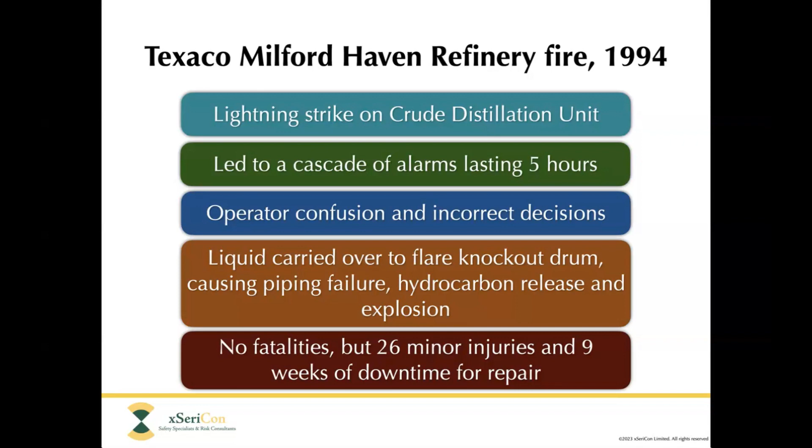And I could give several other examples as well, but I think one is enough just to get a feel for why this is an important issue. So what are we actually trying to do then with alarm management? What we're trying to do is to look at the alarms that are configured in the system and to make a decision about whether each alarm really needs to be there and whether it's actually serving a useful purpose.

In the alarm management process, we are trying to make sure that every alarm has a defined purpose. We're trying to make sure that each alarm can guide the operator to take an appropriate corrective action. So in other words, it actually helps him to understand what's really going on, what is the root cause of the situation that he's facing.

And we're also trying to make sure that those alarm floods, like the situation that happened at Milford Haven, are as unlikely as possible to occur. We can never say never, but there's a lot that we can do to reduce the risk of alarm floods. Because once the alarm system is in flood, the operator really has very little chance of coping with the situation, because he's just dealing with a red screen and with a siren going off all the time. It's very hard for him to mentally stand back from all of that kind of intrusion into his mental space and really try and focus in on what's happening.

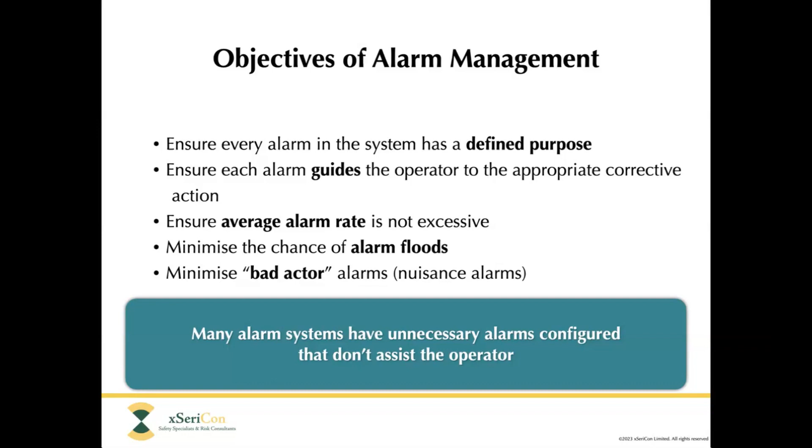And the other thing we need to do is minimize what we call bad actor alarms. And these are alarms that are coming to the operator but are not helping him, maybe because there's nothing he can do, or maybe because the alarm is not really necessary, or maybe because the alarm is always on, is always there, and he knows that it's just a nuisance and there's nothing he is supposed to do.

So overall, what we're trying to do is to make sure that the alarm system can actually provide its function of risk reduction, or to put it another way, that it actually functions as a layer of protection. As you may know, if you've got experience of doing HAZOP studies or SIL assessments, very often we take credit for alarms with operator response as a way of reducing the likelihood of an initiating cause, an initiating event, propagating through to a serious incident. And we can only be confident that the alarms can really provide that kind of risk reduction if we're sure that the system is well set up.

In other words, that the operator has actually got the ability to respond to the alarms, enough time, and the alarms actually help him to understand what's going on, that he's not going to be overwhelmed with too many alarms or useless alarms, and that he actually has confidence that the alarm system is basically doing what it's supposed to do, and not just providing new and irritating noise in the background and covering the screen with messages that he doesn't know what they mean, or he doesn't know how to respond to them.

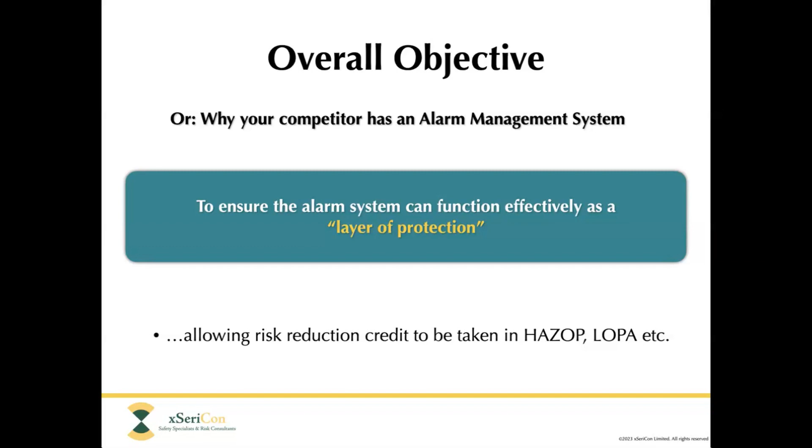So in order to help us on our alarm management journey, there are some standards and guidelines that are typically applied across the industry. And these days, in my experience, it seems like the most commonly applied standard is ISA 18.2. This standard covers the whole of the alarm management life cycle. And in particular, it provides a lot of detail about what should be in a document called the Alarm Philosophy document, which we'll talk about a little bit more in a moment.

And it also provides some quite clear guidance about what we call KPIs, which are key performance indicators. And these are numerical measures of how well the alarm system is performing, something that we can measure to see if it really can be credited as a layer of protection. ISA is from the American body called the ISA. There is also an international standard called IEC 62682, which is pretty similar to the ISA standard, but in practice, I don't find it actually applied all that often.

There is a guideline called EEMUA 191, which comes from a UK-based organization called EEMUA. It's important to remember that this is a guideline and not a standard. So it's not really possible to audit against it, and it's not intended for that purpose. It tends to offer multiple options for anything that you want to do. So it's not prescriptive. It doesn't really tell you what to do. It just gives you ideas and examples. It's a very substantial document. And if you are thinking about getting into alarm management, then it certainly is useful to have an awareness of what it offers, but it's not going to give you clear direction about exactly what to do and how to make your decisions.

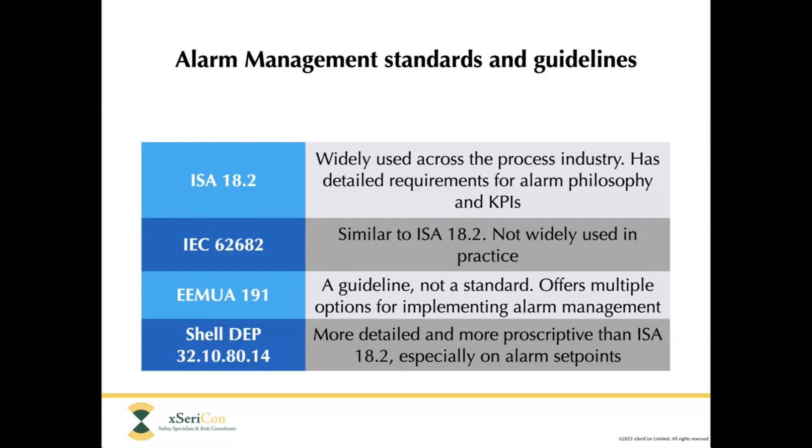So I mentioned briefly in passing there something called the alarm management life cycle. What is it? Well, you may be familiar with the concept of life cycle from other areas of process safety and also quality management as well. The life cycle is the various steps that you are expected to go through in order to successfully manage your alarm system. And so it goes through various steps, such as, first of all, defining what alarms you need, and you have already if it's an existing system.

And then you go through a process which is called rationalization, which is where you try to assess whether all those alarms are really needed and whether they're properly set up so that they can actually do their job of risk reduction. Then you may go through various refinement processes where you make changes to the alarm system in order to try to improve compliance with the KPIs that you set for yourself.

And then you run the system for a while, and then you measure the system's performance, and you need to keep on cycling round. So it's not enough just to do it once and then walk away, because like everything in the field of process safety, there's always a drift away from the ideal or the as-designed configuration. Alarms get changed, process conditions gradually change, operating expectations gradually change, and so the alarms also need to change from time to time as well.

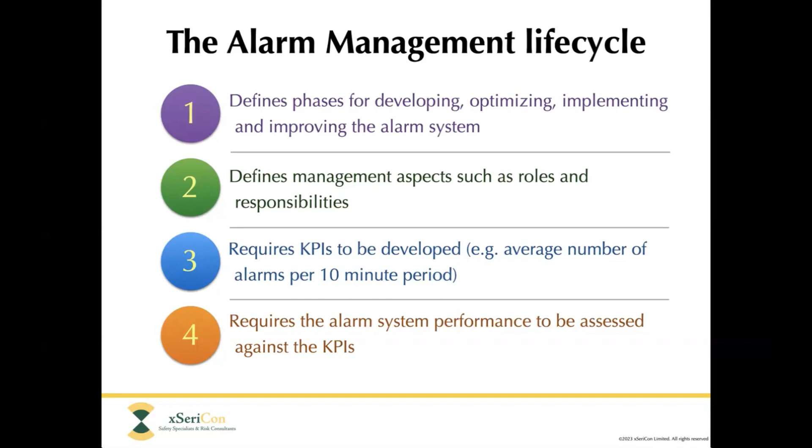So your alarm philosophy also should indicate the KPIs that you are going to measure and try to comply with. And then your alarm philosophy will also say how often you're going to review the alarm system performance against those KPIs to see what remedial action needs to be taken. And there are other things as well that need to go into the philosophy document, but that's just to give you an impression of the main aspects that are important.

So the alarm philosophy document is really the heart of the alarm management system. It should be the go-to document to describe how we're going to do it and what we need to do next and what the goals are. It kind of works a bit like a safety management plan, but specifically focused on the alarm system. And it needs to be compliant with the standards.

So whichever standard you're trying to apply. And as I mentioned before, if you are applying ISA 18.2, that has quite a lot of specific requirements for the alarm philosophy document. One thing I would like to emphasize is the APD, alarm philosophy document, is not a procedure. So on top of that, you may also need some procedures for certain aspects of the alarm management life cycle, in particular, the alarm rationalization activity. So philosophy is meant to be kind of a higher level where it's just providing overall guidance and direction setting for the alarm management.

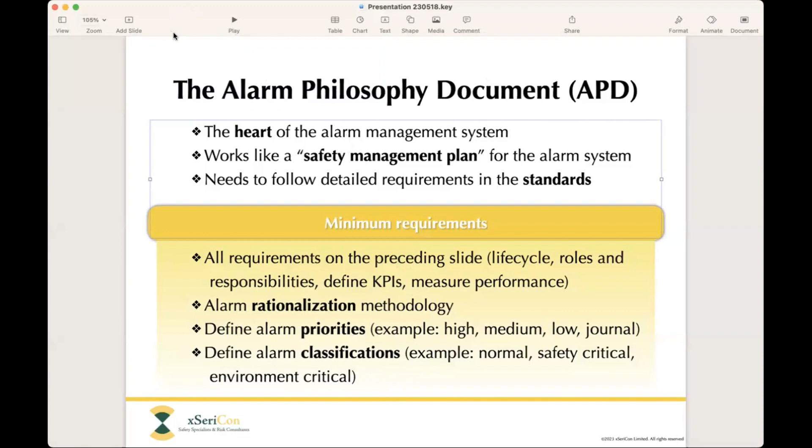Okay. Just, sorry, just going to fix one little problem. Okay. Right.

And the other thing that the alarm philosophy document, that the standards require, is to define something called alarm classifications. Now, the purpose of classifications is to define what type of alarm it is, usually in terms of how much maintenance, how much testing is needed for the alarm. In other words, how critical it is for a certain purpose. So an example of a classification would be a safety critical alarm, where maybe it's being used as a credit to mitigate a potentially very serious incident.

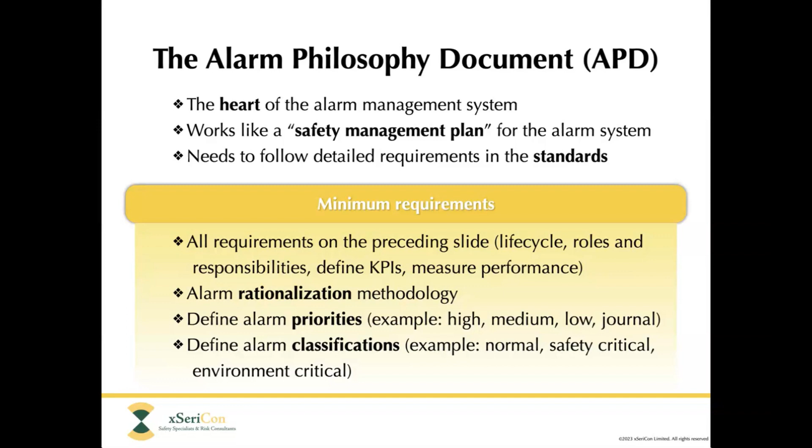Or another example would be an environment critical alarm. And this is an alarm that's warning you that you are going off spec in terms of emission limits that might be reportable to an authority and could eventually lead to a fine or prosecution. So those alarms probably would need to be tested and maintained more frequently than all your regular alarms in the system. And so one way of handling them is to create a class or a classification for those alarms. Now, in practice, to be honest, I don't see classification used very much. But in principle, the standards usually do say that you should have such a thing as alarm classification.

Okay. So the next thing to do is to, as I said before, list out all the alarms you've got in your system and ask the question about each one. Is this alarm really doing the job that I need it to do, which is to help me run the plant safely without overwhelming the operator with too much information? And there are some questions that you should ask about each alarm to make sure that it really needs to be in the system and it needs to be configured.

The next thing is it needs to be aimed at the operator. So if the message that the alarm is giving is actually aimed at someone else, like, for example, maintenance personnel or management or the instrument department, and it does not require attention from the operator, then it should not be counted as an alarm and it should not be directed to the operator. You shouldn't really use the operator as a conduit to channel information through.

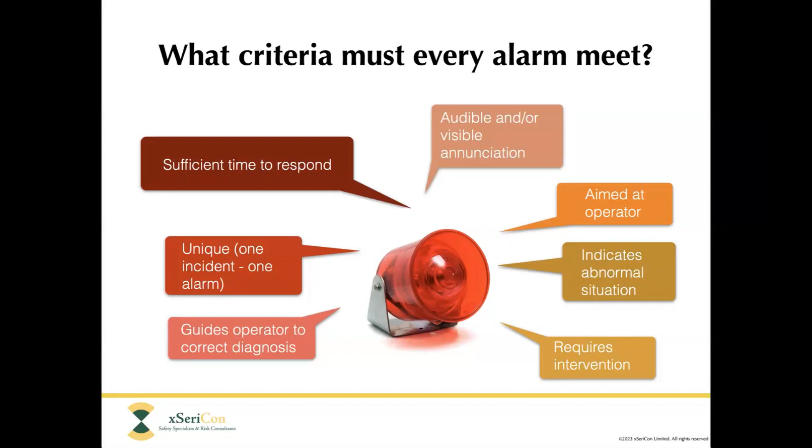So once we've determined that maybe all is not well with our alarm system and the alarms do need some adjustment in order to meet those criteria that I just showed, you then go into a process called alarm rationalization. Or sometimes you'll also hear the term alarm objective analysis, and there are some differences between them, but exactly what the definition of one or the other is doesn't seem that clear. So I prefer to just stick with the term alarm rationalization because it is very clear about what we mean by that.

So when we do alarm rationalization, it's normally in a workshop. We sit down with process guys, operations guys, instrument guys, sometimes with the electrical team as well. We review all the alarms that are configured maybe in the whole plant or in a certain plant area to ensure that they meet the criteria that I showed you on the previous slide, which were these ones. And if they don't, then we make adjustments to try to bring them into compliance with those criteria.

We also will make sure that each alarm has got a defined priority, whether that be high, medium, and low, for example. And that's normally done by following some kind of rule set that's defined in the procedure. And the most typical way of doing that is you have a matrix which shows the severity of what happens next if the operator doesn't respond to the alarm on one axis. And on the other axis, you show how much time is available to respond to the alarm. And of course, the shorter the time available and the more severe the consequence, then the higher the alarm priority needs to be.

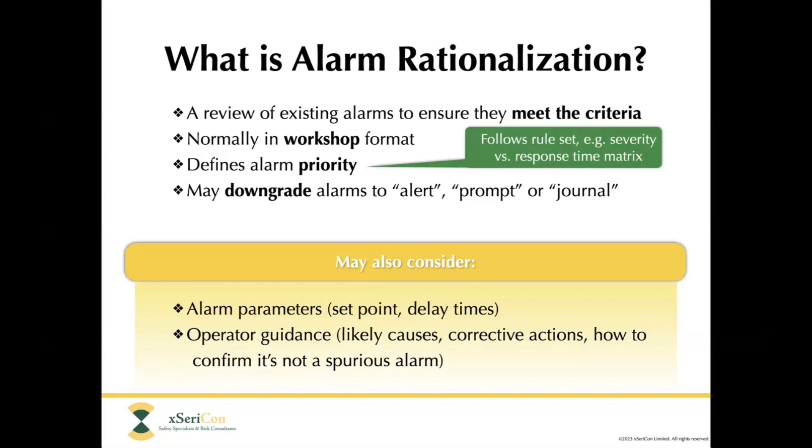Now, we mentioned right at the beginning the problem of alarm flooding, and one of the most important purposes of alarm rationalization is to reduce the risk of alarm floods, because we want to avoid being in a situation like at the Pembroke Dock refinery. What is an alarm flood? Well, it is a sudden increase in the rate of alarm annunciation, which exceeds the operator's capacity to assess and respond to each of those alarms. And it's caused by some kind of incident which is not part of the steady state operation.

Now, it doesn't necessarily have to be an unexpected incident. It could be something that you expect to happen from time to time. Let's say, for example, switching over from compressor A to compressor B. Now, if your alarm system is not well set up, that might trigger a whole cascade of alarms coming from compressor A when you shut it down.

Which might be tens or even hundreds of alarms if the system is really not well set up. So that would be a planned incident, but what we're usually more worried about is alarm floods arising from unplanned incidents, such as a lightning strike.

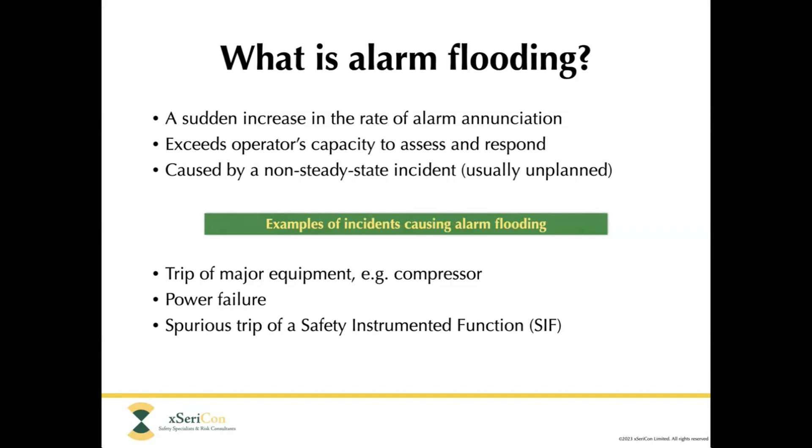Okay. All right. So another thing that we mentioned earlier in the talk is bad actor alarms. Now let's give a little bit more detail about what bad actors are. And alarm rationalization, another of the purposes of it is to cut down as low as possible the number of such bad actor alarms. Bad actors are alarms that come, which are annunciated, but don't help the operator, and instead they just cause distraction or confusion. And they may be a significant contributor to missing your KPI targets.

Some common examples of bad actors are, for example, fleeting alarms. A fleeting alarm is an alarm that just comes for a few seconds and then it disappears again. And then it comes and then it goes, and it comes and it goes. They're very irritating for the operator. They can fill up the screen with notifications. And it's obviously a situation that he doesn't need to respond to, because whatever the problem is, it's not there all the time.

So it may be caused by something like a loose wire, as we said before, could be a badly tuned alarm. Maybe the set point or delay time needs to be adjusted. Could be just some completely spurious issue, could be caused by some electronic noise, some radio frequency interference, RFI, could be multiple causes. But fleeting alarms, you need to identify them and you need to get rid of them and deal with them.

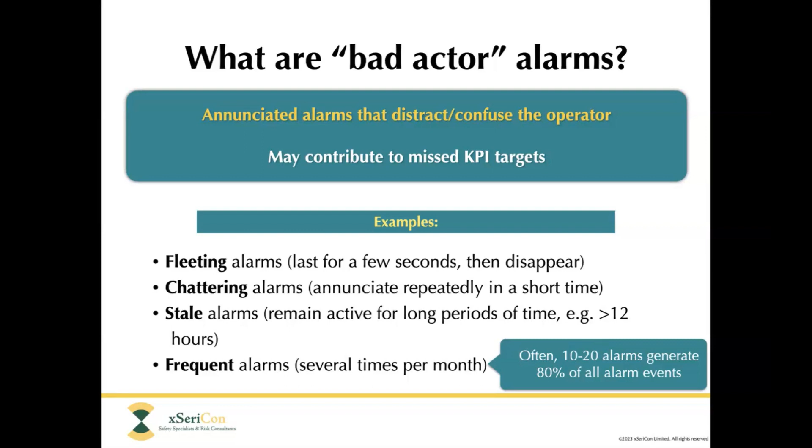And if that is true, which it normally is, then that's not a good state of affairs, because that shows that there is something wrong with the design of those alarms and they need to be dealt with. So that you would do in your alarm rationalization. So why is it so important to be aware of bad actor alarms? Well, as I said before, they provide distraction and confusion for the operator.

Another reason is that the operator may try to get rid of them. If he's allowed to, for example, disable the alarm, then that's exactly what he may do. Just say, oh, this alarm is just such a nuisance, I'm just going to disable it or block it or override it. Or sometimes in some systems, the operator is allowed to change the set point. So what you might find is he just changes the set point to 9999 or something like that, which means that the alarm no longer can perform its original purpose. And that might have been a safety critical purpose.

So that's an important problem there, because the operator may be driven to take an unsafe act, which is effectively disabling an alarm or making it useless, thereby compromising the integrity of the alarm system. And another problem is that if these irritating and useless alarms are coming to the operator all the time, it reduces his level of trust in the alarm system. And after a while, you find that he's hardly even bothering to look at the alarms anymore. Every time an alarm comes, he just presses acknowledge. Okay, whatever, just get rid of it. It'll just be another nuisance alarm. I don't have to pay attention.

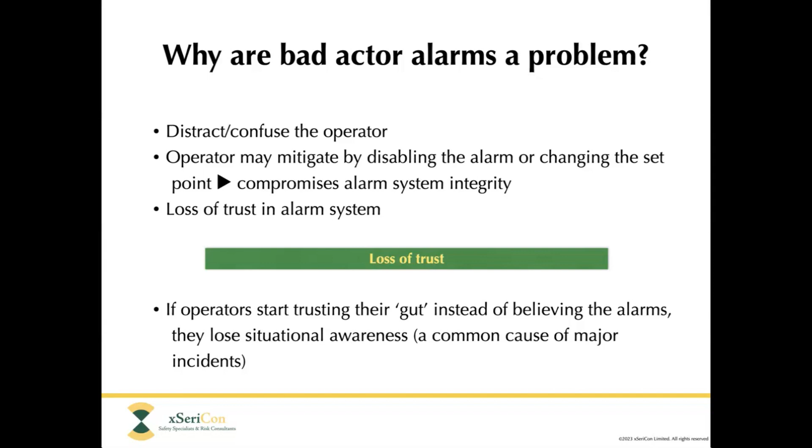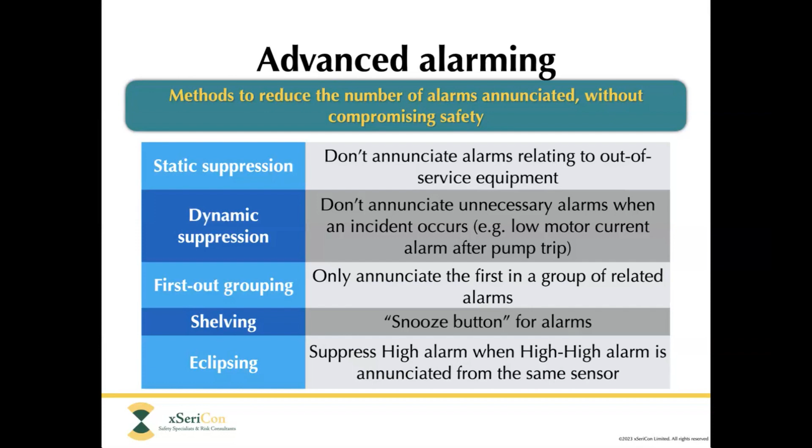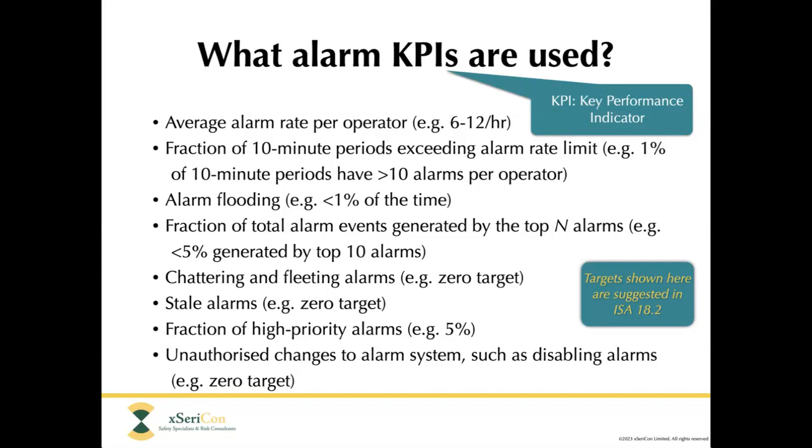All right, well, that's all that I want to talk about for today. I would like to thank you very much for your attention, and I hope that you found it useful and interesting.